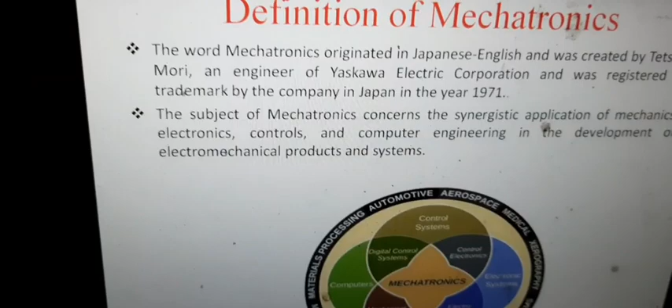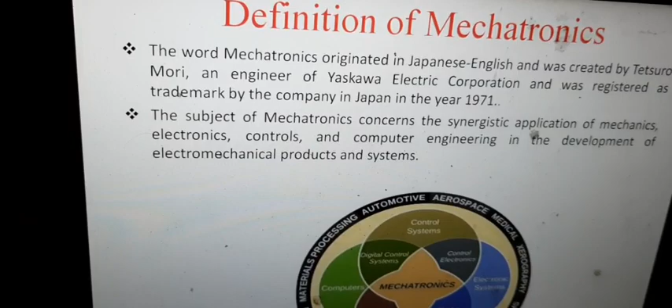So I'll begin with the introduction. Mechatronics was originally introduced in Japan by a senior engineer, Tetsuro Mori. He was a senior engineer in an electric company, that is Yaskawa Electric Corporation. He developed this in the year 1969, and later they registered it as a trademark in 1971. But after some years, they removed the trademark and made it public so that all can use this. Especially this came when Japanese started developing robots in the year 1960.

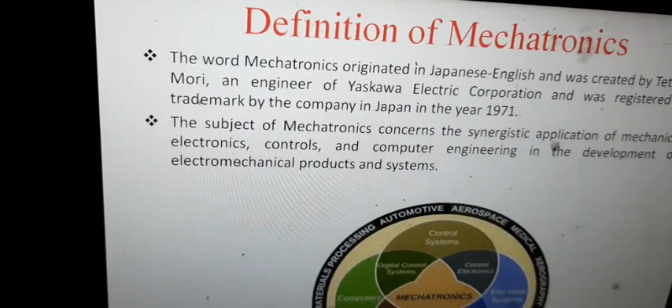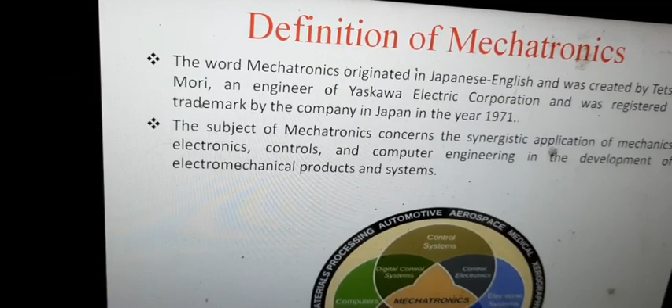So this word, mechatronics, you can see mecha plus tronics. Mecha means mechanism, which comes from mechanical, which is a mechanical thing, and tronics comes from the word electronics. So mechanism means the combination of links and joints which is used to transfer the motion or force. And as you know, a robot is a combination of robotic arms and joints. So this is a mechanism which is used to do a certain operation or task.

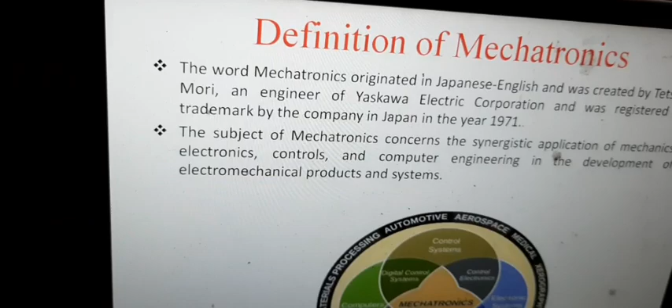And by the use of electronics, they were initially used to operate the robot. So from here the word mechatronics began, but later on it didn't remain only to mechanical or electronics things. Due to the application of sensors, control systems, feedback systems, the application of electrical engineering, computer engineering, control systems, communication systems — all these things came later, introduced in the field of mechatronics.

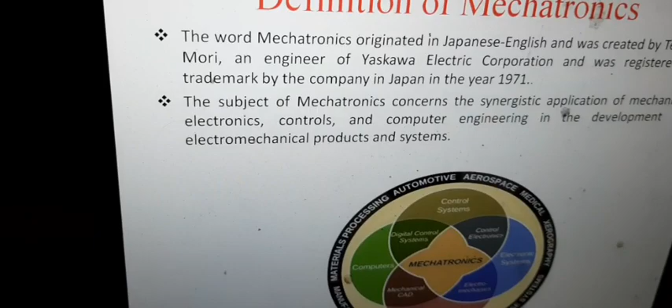So especially it is a combination of electrical engineering, mechanical engineering, electronics engineering, control system, computer engineering, communication system — all these things. But you don't need to study all these subjects or engineering branches in detail. You need to study some parts of these engineering branches so that you can understand mechatronics, or you can become a mechatronics engineer.

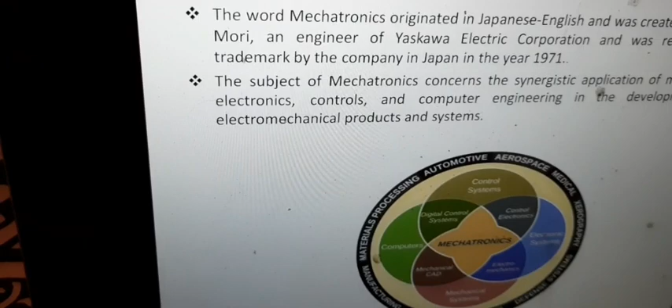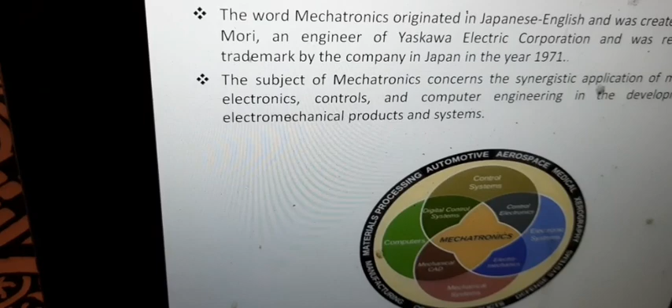So it has a wide range of industrial applications, especially in automotive industry, aerospace industry, medical industry, especially MRI machines, defense systems, consumer products, manufacturing industry, and material processing industry. All these industries are leading towards automation. So everywhere you will find the use of mechatronics. Not only in industry, in your day-to-day life too — in your cell phone, in your watch, in your laptop, in your bike — everywhere you will find the application of mechatronics.

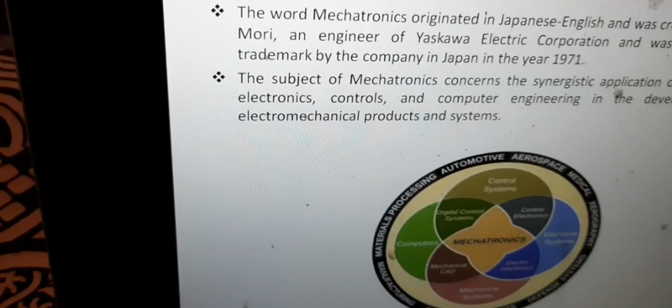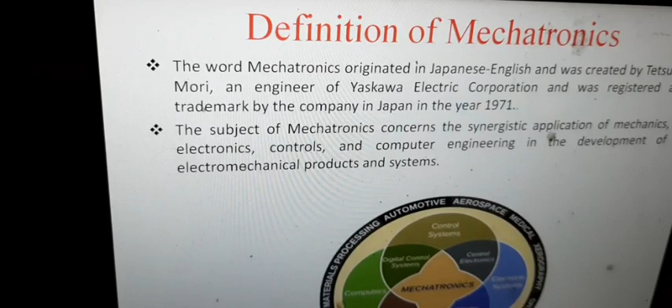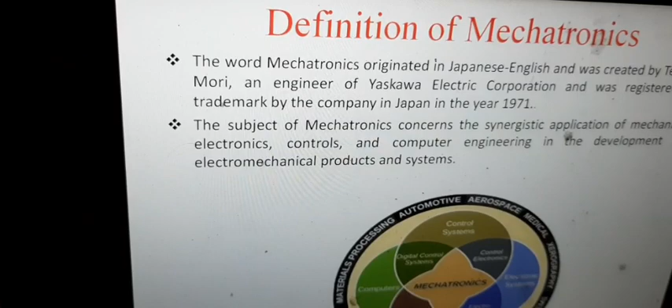So this is the definition of mechatronics. Basically, the subject mechatronics concerns the synergistic application of mechanics, electronics, control and computer engineering in the development of electromechanical products and systems. So basically you need to gather knowledge from all these engineering branches to develop a product which can work in a more efficient way.

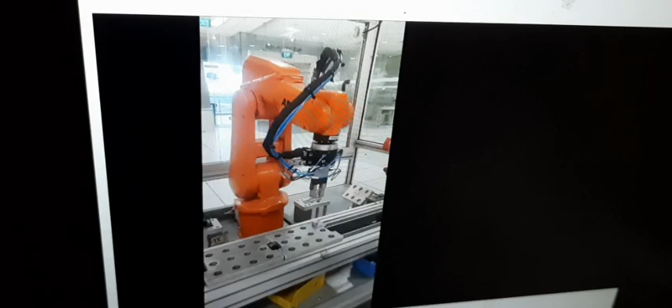So in this video you can see a perfect example of mechatronics. This is a robotic arm. You can see the arm and the joints, and it is picking the pallet from one place and keeping it in another place. We taught the robot the position so that it is able to guess from where it has to pick the object, and to where it has to place the object or pallet. So this is an example of mechatronics.

Here it is automated, but we have not used any kind of sensor. In the second video, you can see the robot is able to guess which is metal and which is non-metal. You can see here it is picking that plastic one, which is a non-metal thing.

It is sensing and guessing, able to sense that which is metal and which is non-metal. You can see here the metallic things are kept in the blue bucket and blue basket, and the non-metallic things in the yellow basket. So here, along with the mechanical and electrical electronics, we have used sensors also.

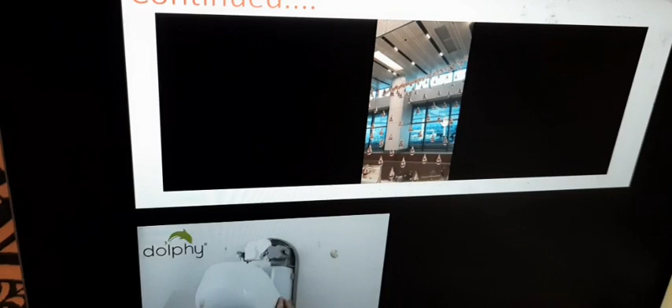This is an example of mechatronics. Moving to another example, this is a beautiful video I made at an airport. You can see the raindrops are automatically falling, and they have set the program so that the drops fall in the form of a sinusoidal wave. This is also an application of mechatronics.

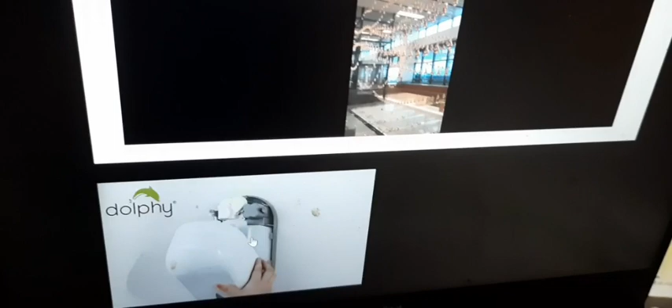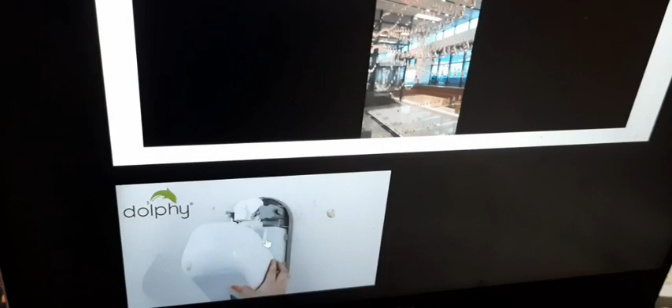During this corona time, people are preferring to use automatic hand sanitizers. You don't need to press anything to make the sanitized liquid flow out. If you place your hand below it, the sanitized liquid will automatically fall into your hand. So it is able to sense your hand and makes the sanitized liquid fall out of the box into your hand.

This kind of application you have also seen at metro stations or airports - automated wash machines, where if you keep your hand below, you don't need to open any tap. Just keep your hand below the wash machine, and the water will automatically fall into your hand. It senses your hand position, and when you remove your hand, the water automatically stops. These are applications of mechatronics.

All these kinds of applications you will see in shopping malls, market complexes, or metro stations. When you enter, the doors automatically open - they sense your position, send a signal to the actuator, and open the door accordingly. These are examples of mechatronics.

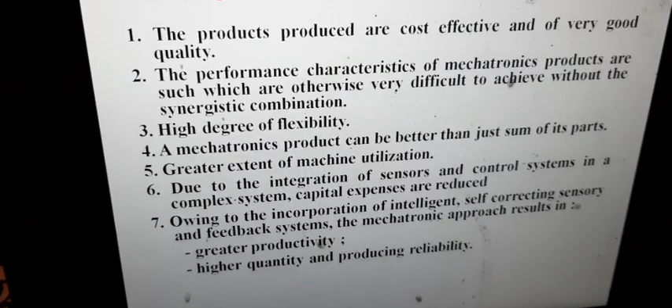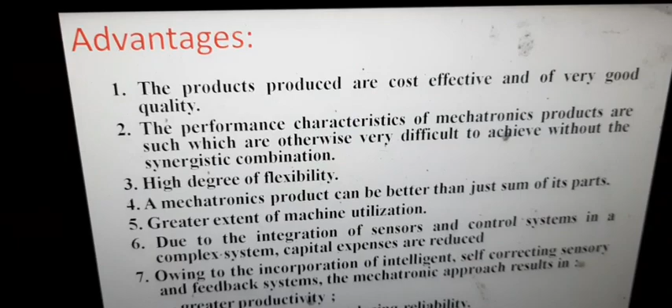These are the advantages of mechatronics. The products produced are cost effective and of very good quality, because when you do something manually without automation, there may be a chance of different kinds of errors - we call it SWIPE in short form. SWIPE means standard error, instrument error, workpiece error, person error, or environmental error. You may face all these kinds of problems.

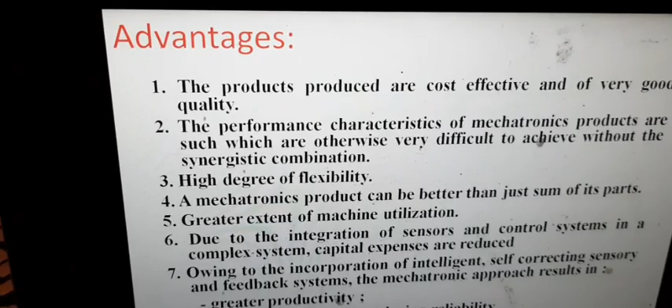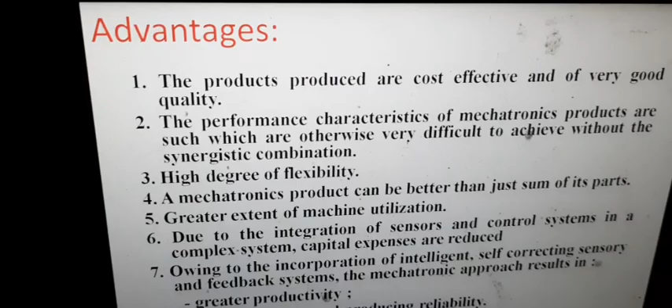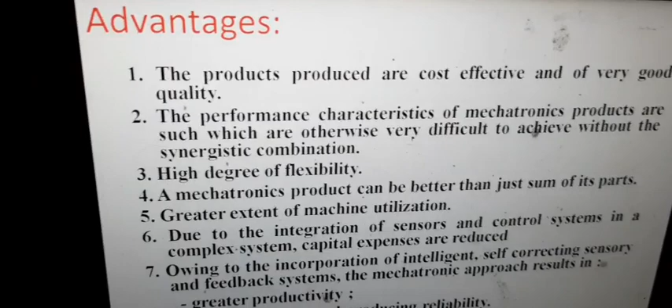But with the help of automation, you just need to feed the program and tell your machine what to do and within what time period, and the machine will do your work. So you will not face human error or environmental error, because you are not doing manual work. This way it will be cost effective, and the product quality will be very good because of this application of mechatronics. The second advantage is that the performance characteristics of mechatronics products are such which are otherwise very difficult to achieve without the synergistic combination.

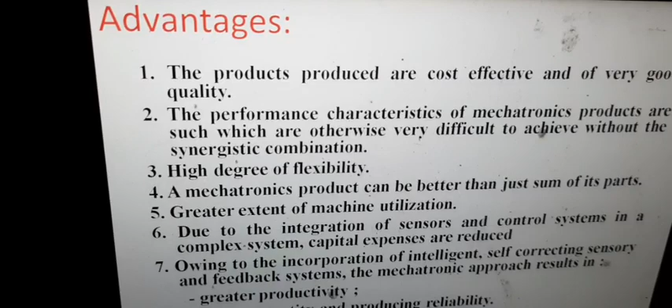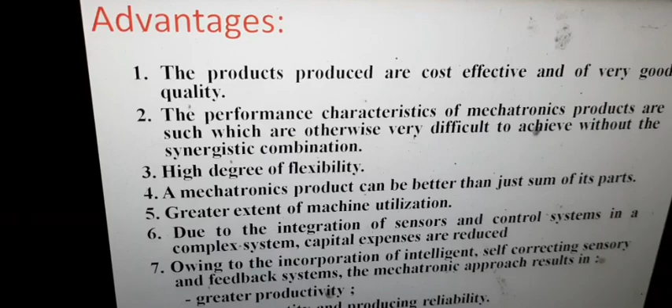With the knowledge of only one particular discipline, you may not be able to design a certain project or product. But with the help of all these backgrounds, like control system, sensors, feedback loop, feedback control, all these things, you can develop a product which is more efficient and which can perform in a better way than by using knowledge from only a particular discipline.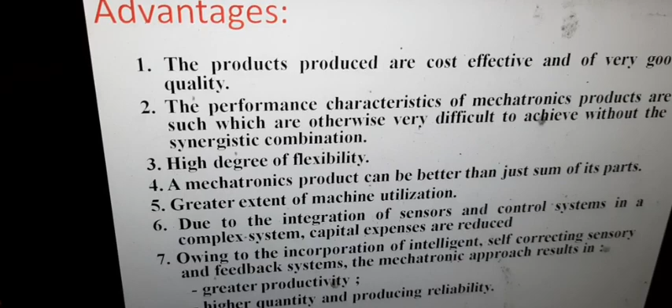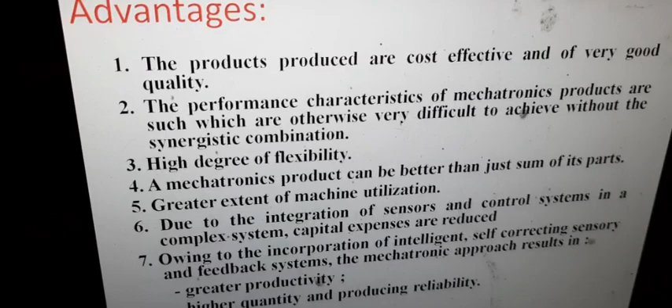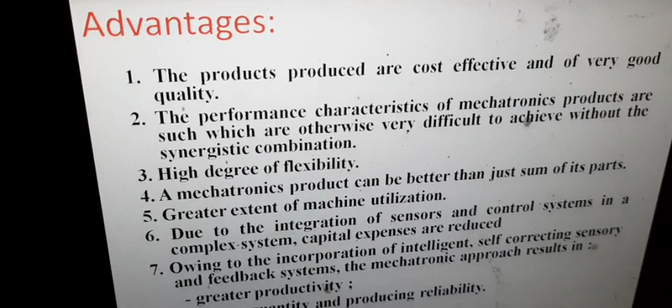Also, it has a higher degree of flexibility. Certain things which you cannot measure, or observe, or get the data manually, but this you can, or certain tasks you cannot do manually. For example, the JCB or any lifting device, you cannot lift that heavy instrument or machine manually. But with the help of automation, you can do such things which is usually very difficult to do by a manual process.

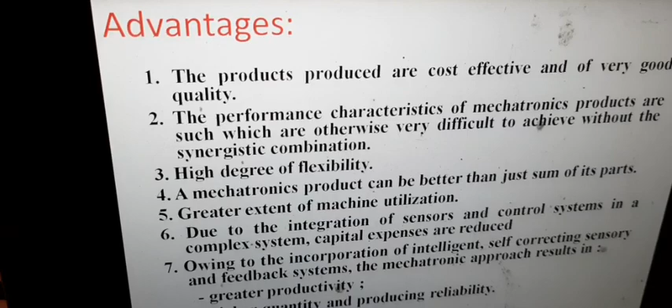So it has a high degree of flexibility, and the mechatronics product can be better than just the sum of its parts. This is the fourth point, and the second point is quite similar.

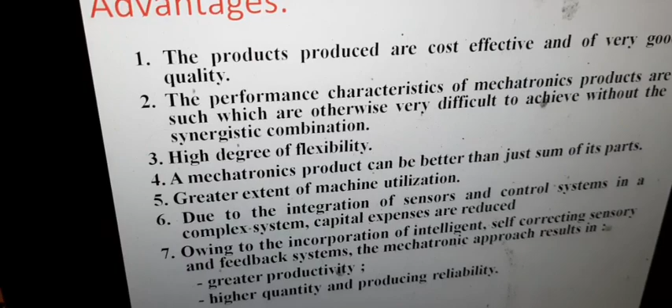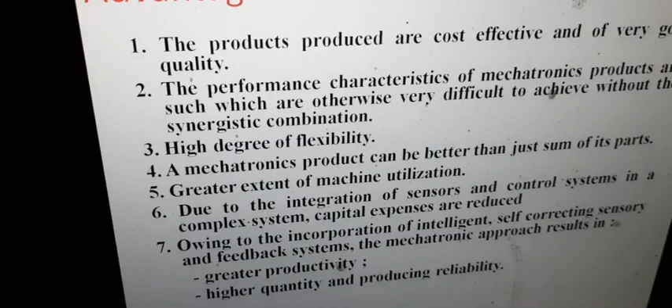And the fifth point is greater extent of machine utilization. A human being may get tired, but once you teach the machine that it has to do certain things, it will do it in a more efficient way than a human being. You just teach the machine, keep it running, and it will do your job. So it is greater extent of machine utilization.

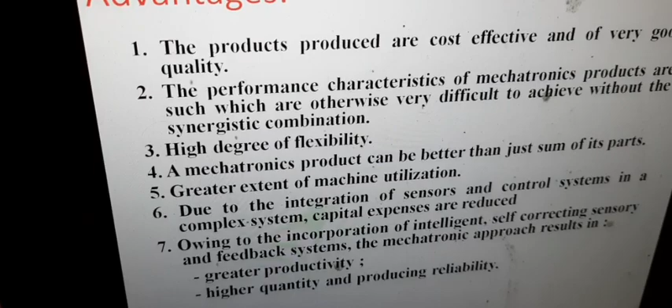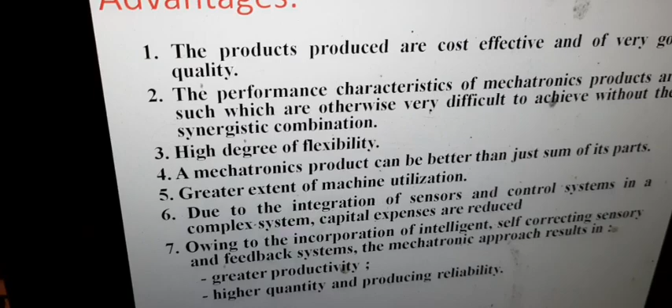The next advantage is, due to the integration of sensors and control systems in a complex system, capital expenses are reduced. Without the use of sensors, for example, in a shopping complex, you see doors will automatically open, otherwise you have to keep someone to open and close the door. So because of the sensor, your expenses are reducing.

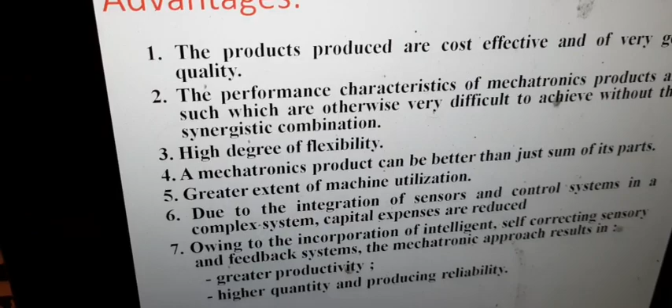Not only in day-to-day life examples, but in industrial applications also, because of the use of sensors, there is a huge benefit from this automation. Especially we can reduce the manpower and increase the productivity. We can get more amount of product within the minimum time period because of automation.

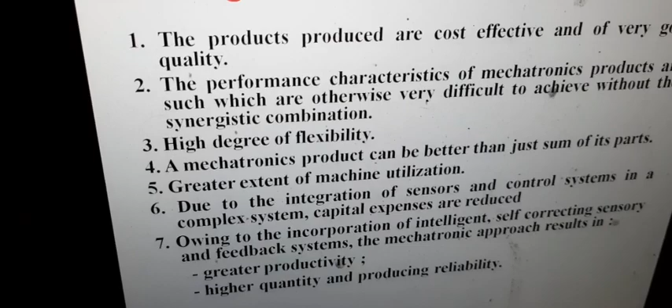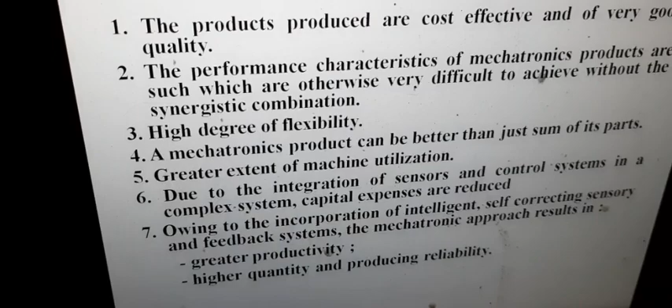And the next point is, owing to incorporation of intelligent and self-correcting sensory and feedback systems, the mechatronics approach results in greater productivity, high quantity of production, and reliability.

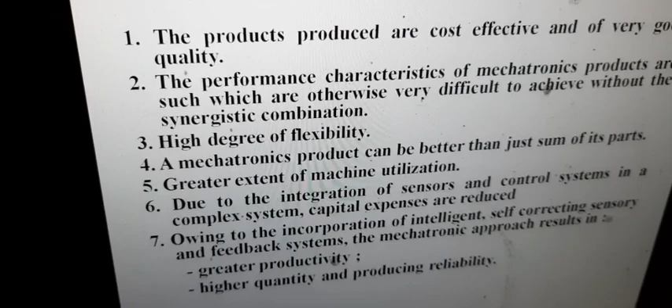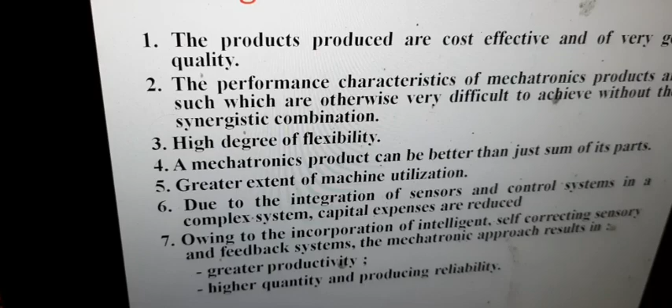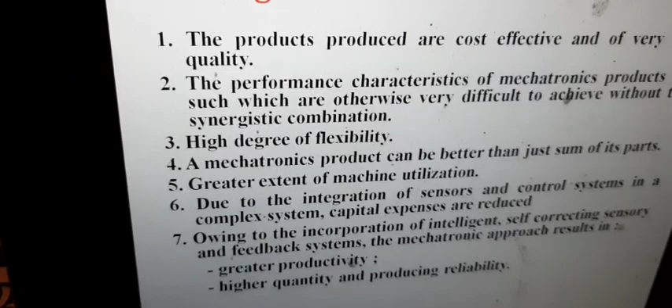We human beings generally may do some kind of error, but with the help of automation, if we know that the machine has to run for a certain time period, after that it has to stop because of heat and frictional loss and other things, then automation will give a feedback signal that this heat limit has reached a certain level, and by this way it will automatically control things, so you can achieve greater productivity.

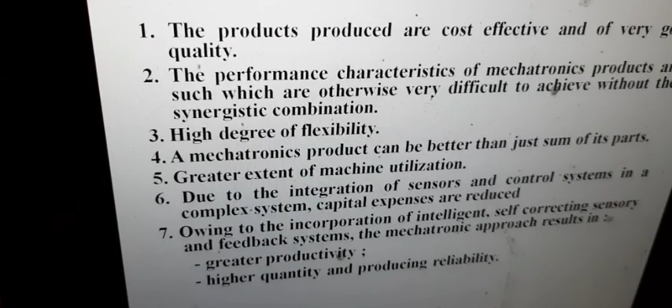You can produce a high quantity of product within a minimum time period, and you can get a reliable product. So these are the advantages of mechatronics.

The disadvantages are, obviously, to purchase the thing, your initial cost will be high, and you have to get knowledge of different engineering backgrounds for designing and implementation. And suppose you face a problem in a particular discipline, then you have to go into details and face the problem separately and properly.

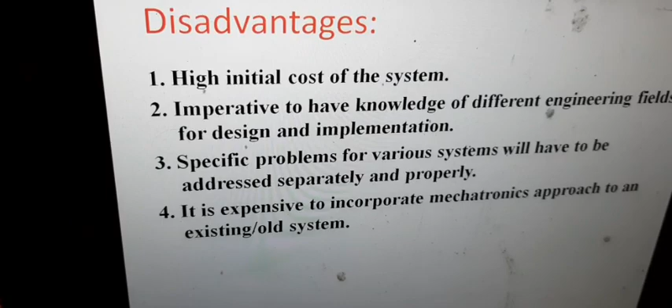Also, it is very expensive to incorporate the mechatronics approach into an existing or old system. It is better to replace the old system and buy a new automated system than to incorporate this mechatronics approach into an old system.

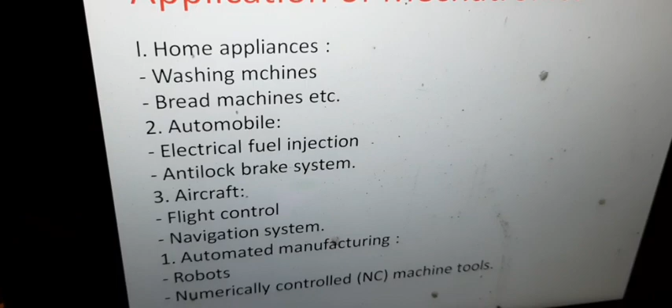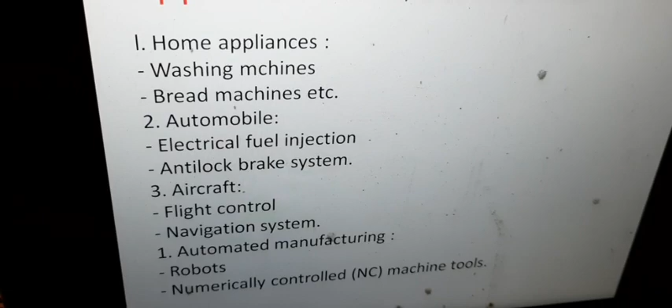So basically, the applications, as I've already told you, are in home appliances like washing machines, bread machines, etc. In automobiles, like electronic fuel injection, anti-lock brake systems, aircraft flight control, navigation systems, and also in automated manufacturing industry, like in robotics and numerical control machine tools. Everywhere you will find the application of mechatronics.